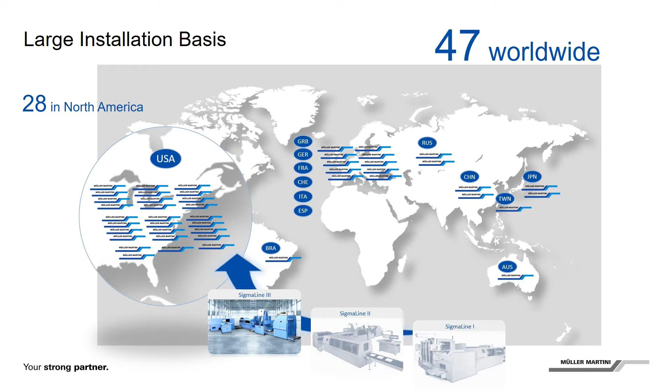Before we go into details, I want to show you this chart. Our process and design knowledge on book manufacturing are based on SigmaLine installations all over the world. 47 installations in total, with its biggest player, North America, that includes 28 SigmaLines, from SigmaLine 1 to SigmaLine 3, which is the latest version. And I'm proud to say that with our most recent developments, we probably achieved the biggest technology leap in the SigmaLine history.

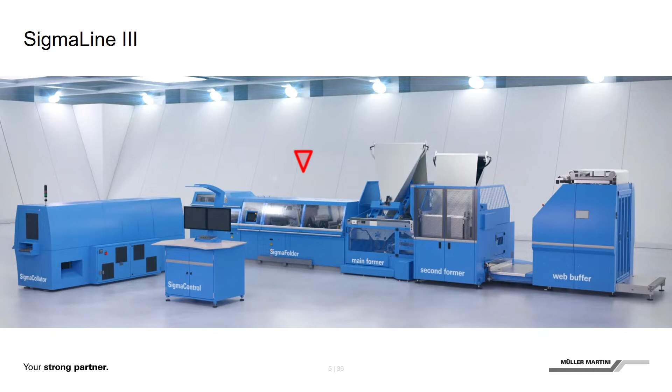The new SigmaLine may look very familiar to you, but inside the machine is where the magic happens. I'm sure you all know the components of the SigmaLine: web buffer, former boards, depending on what folding scheme you intend to run, 1 or 2 former boards. Then we have the Sigma folder. We built this particular machine part from the ground up and incorporated unique features. You will learn about those improvements today. Lastly, the signatures are stacked and glued to book blocks in the collator. All these sub-processes are supervised by the Sigma control desk.

If there's one thing that you should take away from this presentation, it is these 4 key values: performance, accessibility, flexibility, and autonomy. That's exactly what the new SigmaLine 3 stands for. I will explain to you why.

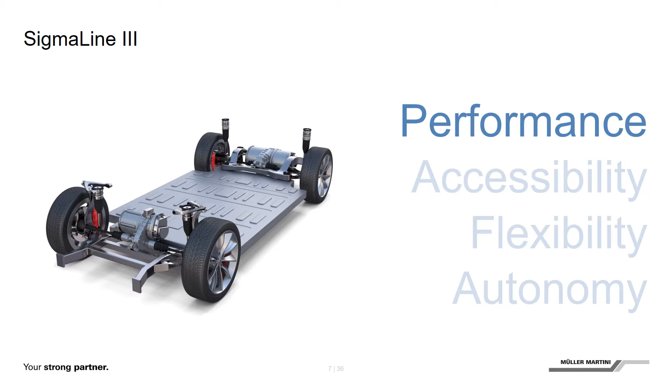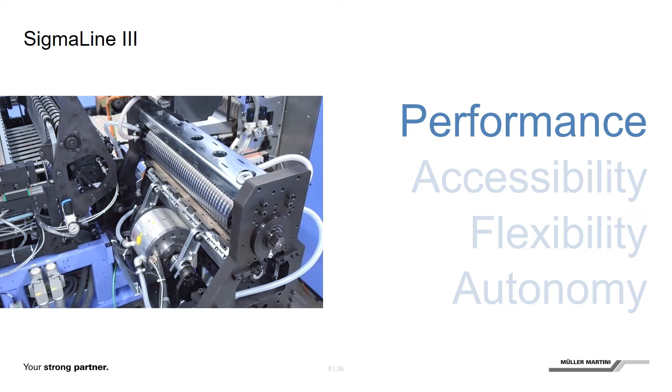Here you see our all-new sheeter, driven by 2 electric servo motors. One for the cutting cylinder and one for the counter knives. Both of these top-notch drives have almost the same peak torque as those in the Tesla I showed you before. But we are efficient too. We use this high power only in specific but crucial moments. 98% of the time, the SigmaLine runs very efficiently. But when the torque is needed, boom, it's there, instantly. I will show you the principle in a minute.

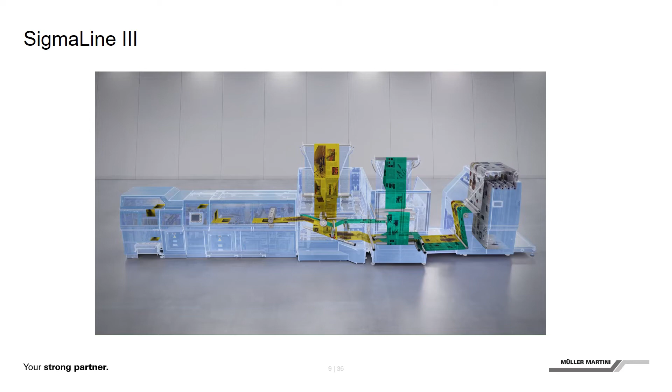Most of you may already know the concept of the SigmaLine. We take the continuous web from any industrial digital printing press and slit, merge and fold it into signatures. These signatures are then stacked and glued to perfectly looking book blocks. Signatures are still the best and most efficient way to produce a book block. Folding the web lengthwise and crosswise enables closed signature heads, resulting in the highest performance in class. So we didn't want to change that.

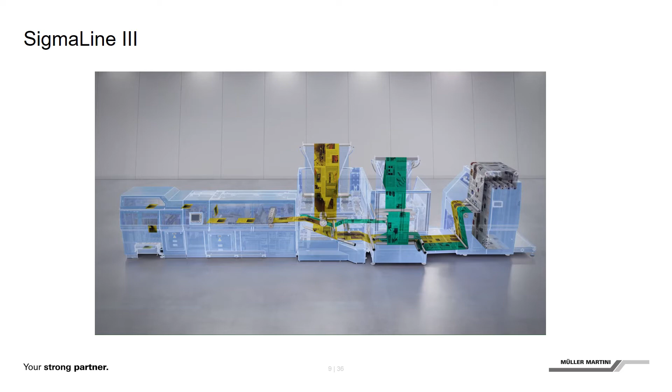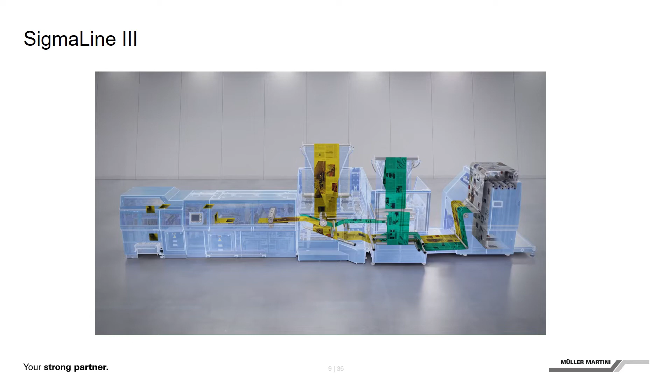But it comes with a downside: blank pages. Depending on your print content, there can be a large number of blank pages at the end of a book, due to the given pagination. But not anymore. We did what nobody thought would be possible. We combined the most efficient way to produce book blocks using signatures with a unique technology to minimize blank pages. Whenever your print content does not match with the folding scheme, the machine autonomously adds a signature with a reduced page number. We call these half signatures.

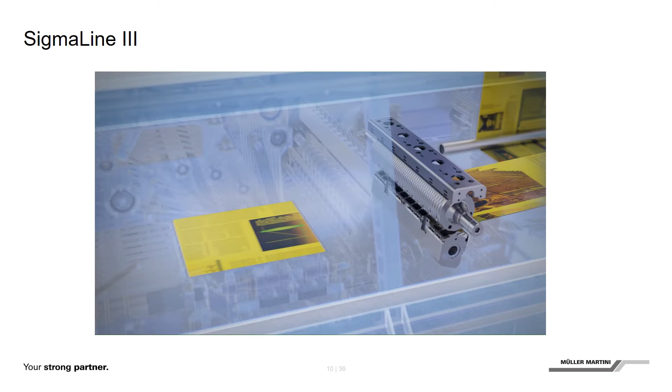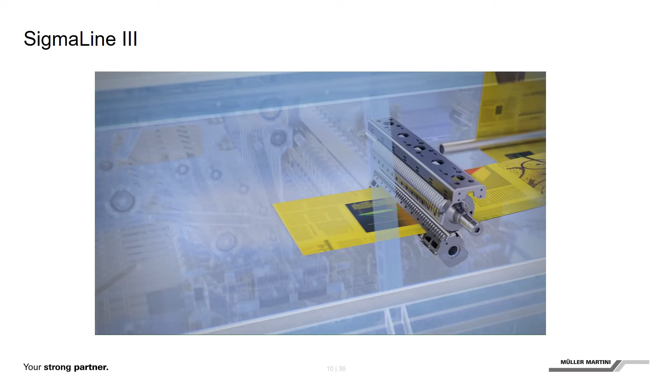This is how we do it. Normally, the sheeter cuts and perforates single sheets that are subsequently folded. Whenever it's needed, the sheeter switches into half signature mode and double cuts. That's why we call it the dynamic sheeter. The half signature is then conveyed through a separate path to position it on top of a regular signature and fold them together.

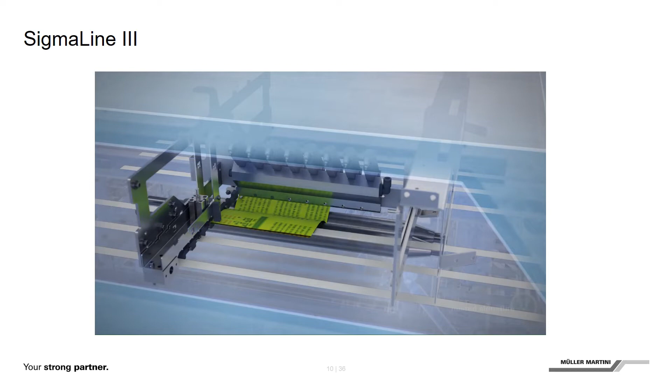Here again, in an overview. The dynamic sheeter normally cuts and perforates single sheets, here in gray, that are subsequently cross-folded, then length-folded, and finally stacked and glued to book blocks.

To reduce blank pages, the sheeter switches instantly into dynamic mode and produces a half signature by cutting twice. The half signature, here in green, is then conveyed separately through the so-called bypass and merged back into the main product stream. We position the half signature on top of a regular signature and fold them together.

Nesting the half signature makes the signature package even more stable. As a result, we have one half signature per book block. We patented this unique method, which allows us to reduce blank pages in a book up to 57%, while maintaining our outstanding performance with signatures.

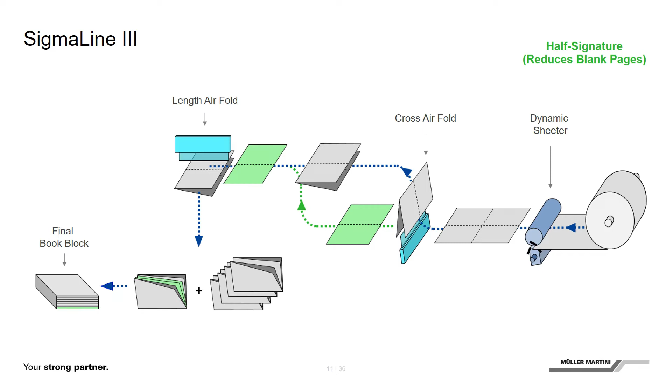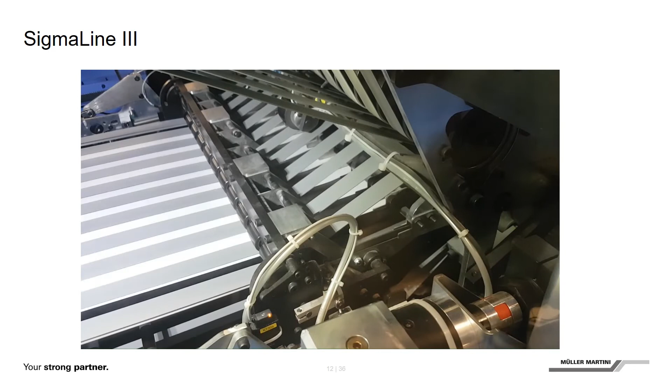Here you see the production of half signatures running through the bypass. We have integrated a super fast signature stop that not only supports the crossfold, but also allows free passage of the unfolded half signatures. The sheeter knife works reliably and precisely, switching between regular perforated signatures and short half signatures within milliseconds.

Perf cut, perf cut, cut, perf cut, perf cut. I think you got the idea. And there is no speed limitation with this functionality, which works up to 1000 feet per minute.

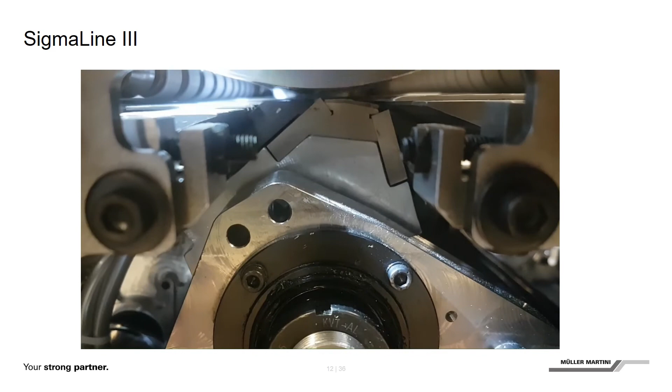So we understand now which key components make the SigmaLine 3 so powerful and performant. Let's now have a look at accessibility.

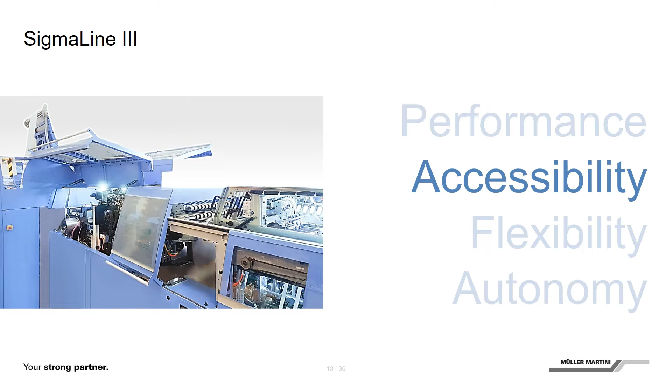And also here I would like to point out similarities to the most valuable car manufacturer in the world. Do you see it? Wait, I go back.

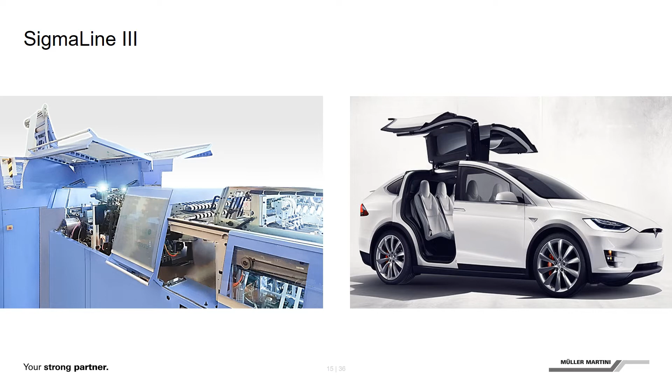Did you get it? The only question is, who was first? You may say now, wait, that's not new on the SigmaLine. We have an older SigmaLine version that already came with Falcon doors. That's true. We have used Falcon doors for quite a while. But we didn't stop there and have further improved accessibility on the SigmaFolder 3.

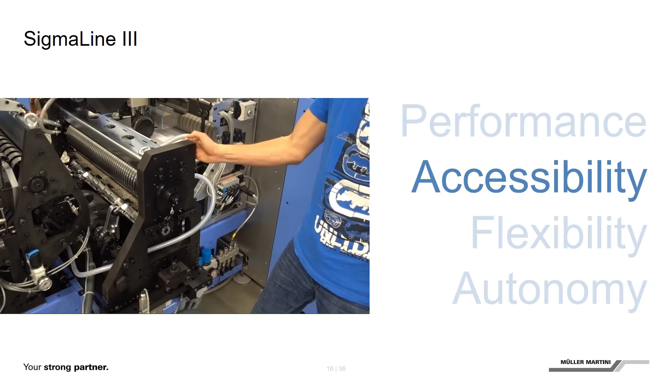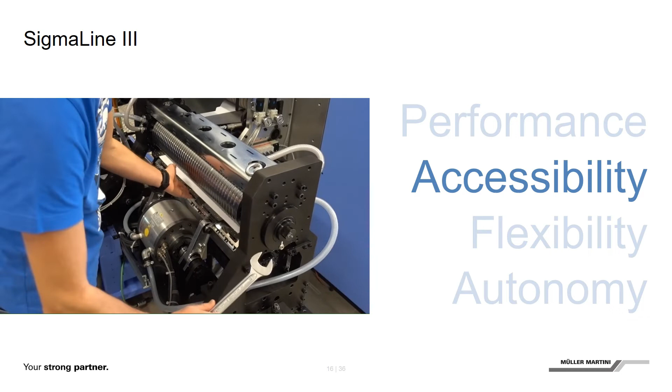Do you remember the dynamic sheeter when I talked about performance? The push of a button on the touchscreen automatically releases the dynamic sheeter. The entire unit can be easily pulled out of the machine without any special tools or additional devices. Perfect access on an ergonomic height enables to quickly replace knives or to simply check current cut quality.

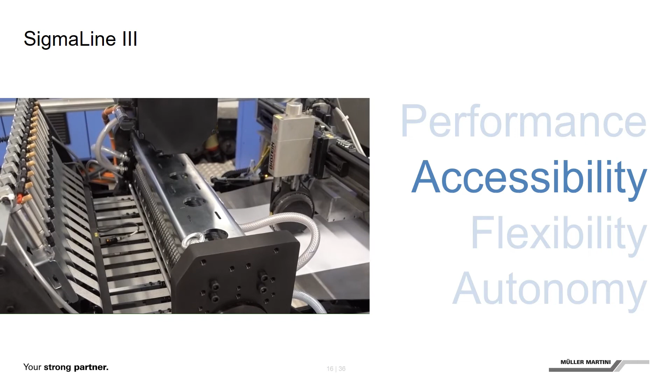Another great example demonstrates the excellent accessibility to the paper path in our new length folder. But why did we do this? Because we understand how vital machine uptime is. Machine uptime is a vast contributor to net output and performance. After machine stop, it is crucial to be back in production as fast as possible. Good access to the paper stream helps tremendously.

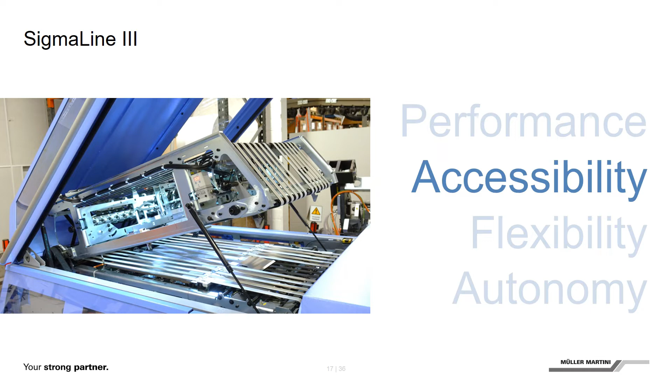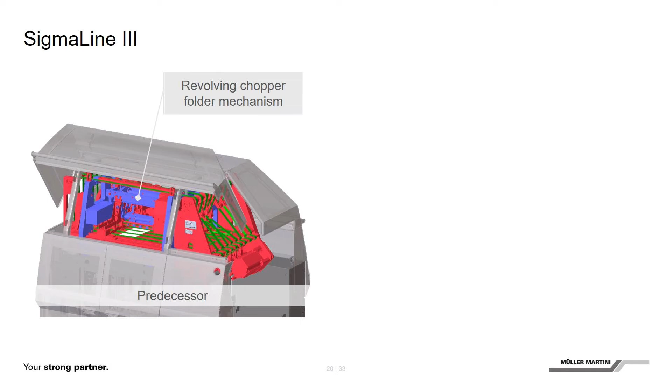Let's see what allowed us to make such an important improvement. On the left-hand side, you see the length folder of the Sigma Folder 2. We have this massive folding mechanism with the fast revolving mechanical sword. A very heavy machine frame is required, not only to keep up with the resulting high rotation forces, but also to ensure the required precision between the fold rollers and the sword.

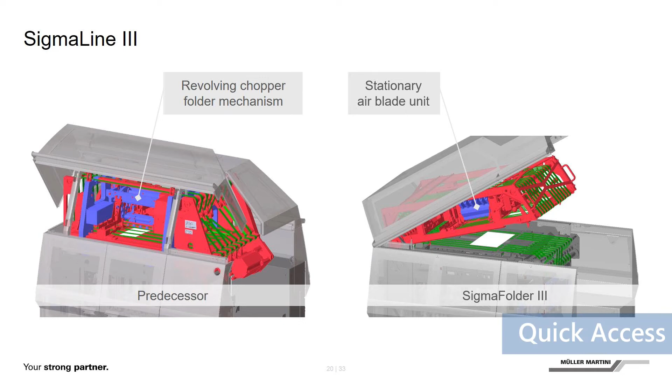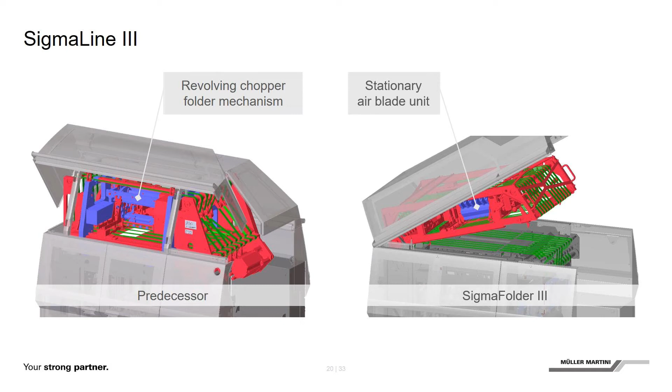On the right hand side, you see our all new length folder design. Müller-Martini invented a completely new folding principle. It is so simple, people keep asking why no one else came up with this idea before us. Do you see the differences between the two designs? How massive the old version was, and how elegant and simple it looks on the Sigma Folder 3.

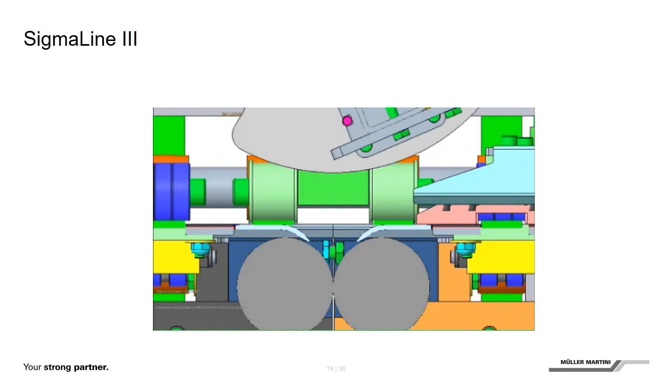I believe most of you recognize the mechanical length sword that is depicted here in detail. If the sword is not adjusted precisely to the spinning fold rollers, process complications or even scuffing can occur. And additional deflection guides that swivel up and down are required to avoid dog ears at higher speeds. This technology is part of the past.

We got rid of all these mechanical devices and use simply air instead. Compressed air initiates the folding impulse. We simply blow the signature between the revolving fold rollers. We call this system length air folder.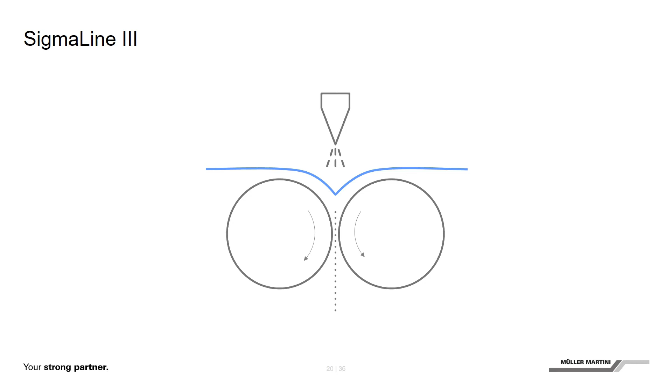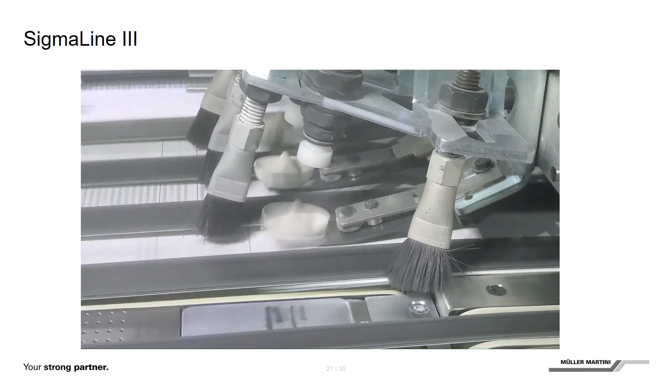You may probably ask yourself, how can this be precise? Well, as we don't accelerate any parts, only air, the response time of this system is by factors faster and more precise than any mechanical apparatus. Let's review this in action. You see the signatures entering the length air folder. It almost appears random, as the signatures travel so fast at 1000 feet per minute.

When we have a look at it in slow motion, we see the precision of the paper flow. We even control the signature tails to ensure flawless entering of the subsequent signature. Let's watch it again and focus on the half signature.

I explained how the dynamic sheeter produces half signatures. Review now how they enter the length air folder. The airfold technology allows us to immediately suppress the folding impulse and nest the half signature on top of the regular signature and fold them together. By the way, have you noticed the little sombrero heads that facilitate the positioning of the signatures?

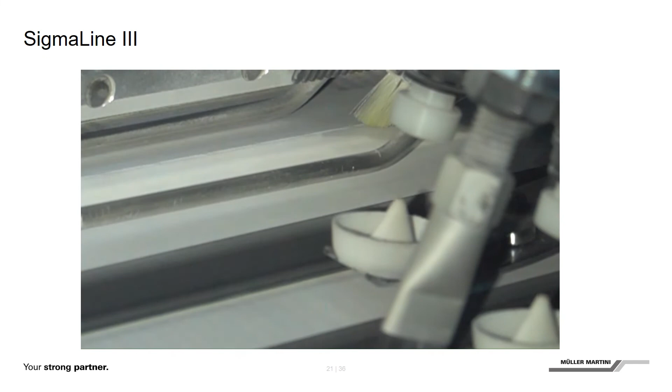We know now how we produce half signatures with the dynamic sheeter and how we incorporate the half signatures into the book blocks using airfold technology. We also use airfold technology for our crossfold. The two folding principles look very similar, so we won't show the crossfold again.

These combined technologies offer advantages beyond accessibility. They provide unique flexibility, production flexibility. With the SigmaLine II, the previous version, you are able to produce signature blocks for softcover and hardcover books. With our patented technologies on the new SigmaLine III, we can expand our production capabilities. The combination of the airfold technology and the dynamic sheeter enables not only the production of regular book blocks for perfect binding, but also the signature manufacturing for saddle stitching and thread sewing.

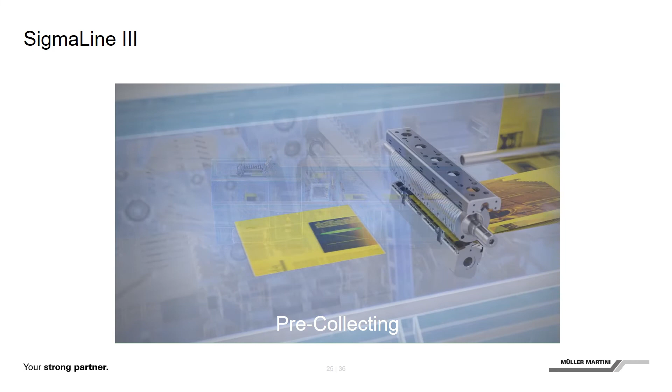Let me show you how this is possible. The incredible flexibility of the airfold allows us to suppress 1, 2, 3, or even 4 folding impulses and stack signatures before the final length fold. Instead of a perforation wheel to facilitate the length fold, we use water scoring. With water scoring, you get that precise and untouched spine, which is needed for saddle stitching and thread sewing.

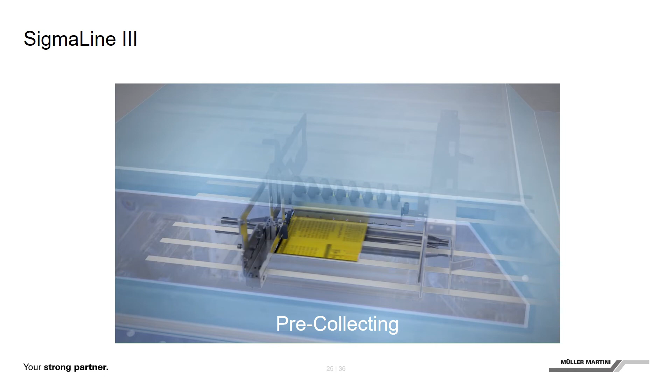After we comprehend what makes our new technologies so incredibly flexible, we come to our last key value: autonomy.

We incorporate barcodes in each signature and scan every single copy along its way through the SigmaLine. After machine stop or print quality issue, our system detects missing signatures and autonomously initiates reprints. When all signatures are complete, and only then, the machine releases the finished bookblock. This is the only true way to ensure 100% product integrity.

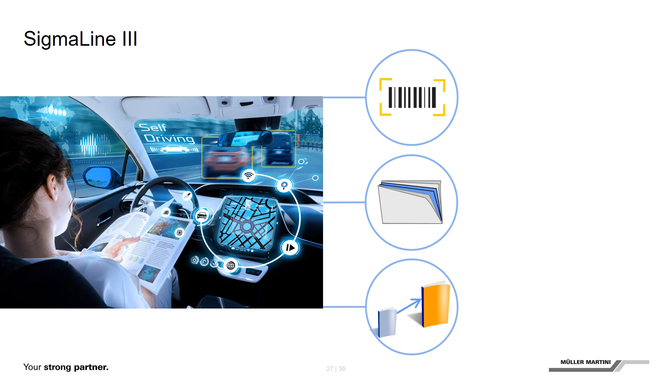Earlier, I talked about half signatures and how we produce them. But the true beauty is, you don't have to worry about whether or not to produce in this dynamic mode, because the SigmaLine entirely takes care of your production. Connex, our intelligent machine software, autonomously adds half signatures to minimize blank pages based on your uploaded PDF files. The SigmaLine changes bookblock dimensions and folding schemes automatically on the fly.

This enables you to line up jobs and produce back to back. Our software management tools remember your machine settings autonomously based on the selected paper names. We call this functionality paper recipes. And finally, we maintained our successful remote service that is facilitated through connectivity to your machine. In case of an emergency, we are there to help you immediately.

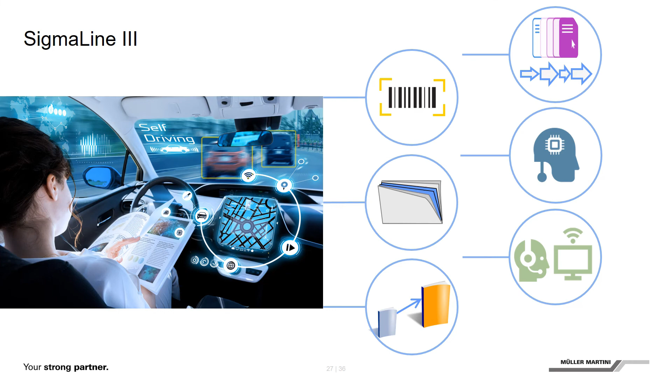Let's memorize again the 4 key values that describe the new SigmaLine III. I showed how we achieve the highest performance in class using signatures to efficiently build book blocks, how our new dynamic sheeter reduces blank pages by autonomously incorporating half signatures. We finally learned that Tesla copied our Falcon doors, or maybe not, who knows.

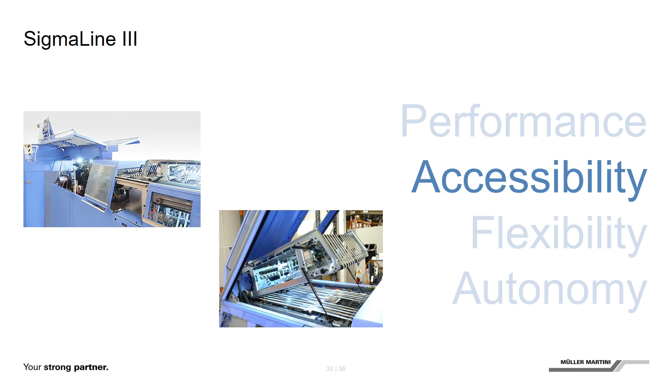But we understand now how the new simple airfoil technology allows us to improve accessibility and hence precious machine uptime, how the technology leap helped us to implement new fields of application such as saddle stitching and thread sewing. And finally, you see that we consistently work on enabling our machines to produce autonomously, using barcodes to track every single signature throughout our entire SigmaLine and even beyond.

You know that we change our book formats and folding schemes on the fly, and that you can line up jobs to produce seamlessly back to back. With the SigmaLine 3, you can process long runs as well as short runs, or even book of one with our VDP, variable data printing.